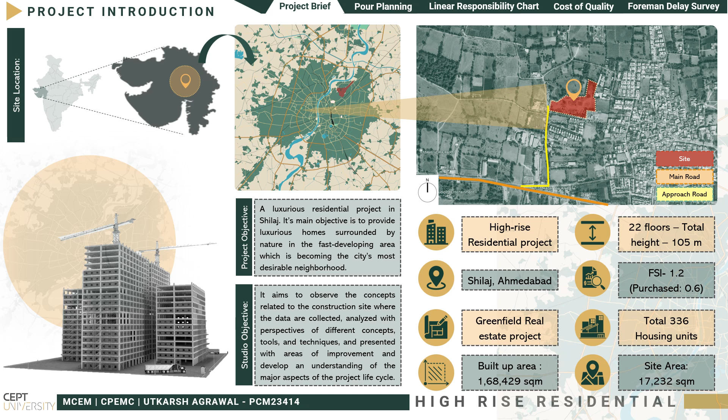This is a labor plus material contract, and the commencement of the same occurred on 17 May 2023. And the expected date of completion is 5th December 2025.

Pour planning is a detailed plan for concrete work that's completed after formwork drawings are approved and before concreting. For our study, out of the 5 towers, we are primarily focused on one tower for easy understanding. And as the towers are identical, there were two pours of same size, and due to privacy reasons, we weren't able to access the structural drawings on the site.

And that is why, from the architectural drawings, the different components of a floor, like slab, beam, and column, were considered and the concrete was calculated for the same. By applying the thumb rule calculation for each component as per the discussion with the industry professional, the steel quantity of these components is calculated and adding the same gives the total amount of steel consumed at the different levels of the tower.

The total quantity of the steel is further divided by the floor area to derive the average coefficient, as the steel of the whole tower is considered in the calculation of the steel for each floor. The value of the coefficient was again cross-checked as per the calculation by equating the same with the pour area for different levels and further was verified from the site keepers.

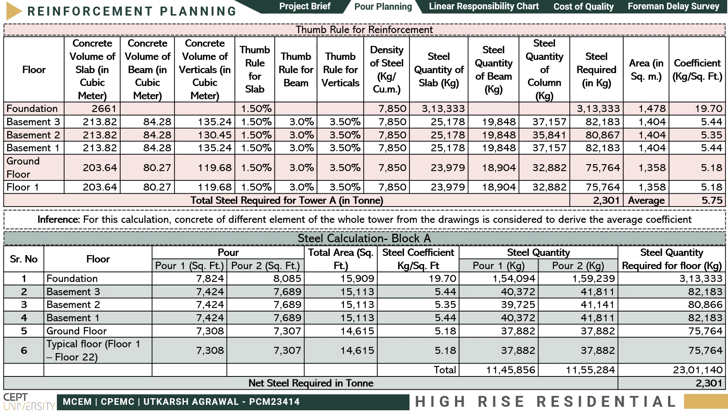For further analysis, we have calculated the peak requirement of reinforcement. It can be seen previously that the highest amount of steel is consumed in the foundation, justifying the reason for the peak in a single month. The next two upcoming peaks, the months of May and July, were also evaluated as there will be more than one pour that will be executed in a single month.

Direct cost is calculated for one pour itself, and the factors considered are reinforcement, binding wire, labor, and machinery cost, which comes out to be 30,27,434.

The labor productivity is calculated considering 25 labors, which includes both skilled and unskilled, that is 20 skilled and 5 unskilled labors, working for 6 days for 8 hours each day for a volume of 37,882 kg, producing work of 6,314 kg per day. The productivity comes out to be 31.57 kg per man hour.

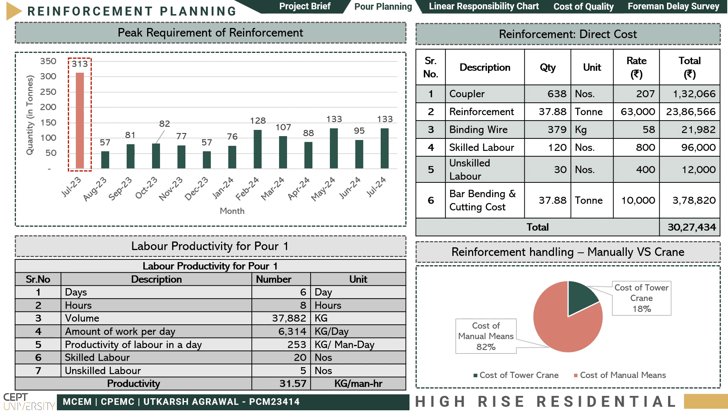Furthermore, we have also compared the cost of handling the reinforcement by crane or by manual means. It can be clearly seen that the cost of handling through crane is very less, but it is a faster method and reduces labor fatigue. Various factors like owning and operating cost were also considered for this analysis.

The linear responsibility chart shows the relationship and interdependency between the various teams on a project. The LRC is developed considering the quality management criteria only. This is the organization structure, and the members marked are the persons directly involved in the quality management process. And to understand their liability, their roles and responsibilities were understood first.

The client has an on-site team, and part of the team is directly involved in the same. Similarly, from the architect and structure consultant, senior and junior architects and engineers are involved as per the requirement of the client. The third party is involved as the inspection is being done before the concreting of each pour, and the third party lab is involved in the various necessary tests needed on site.

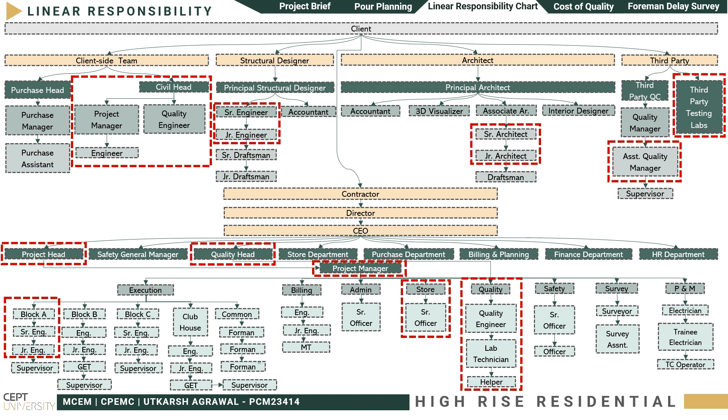The contractor has many verticals other than store and quality which are directly involved. As our prime focus is on one tower, the engineer of that is considered for the analysis. This is the LRC developed considering all three phases of the construction, that is pre-construction, during construction, and post-construction. Only 12 activities from the detailed analysis are shown here. Further, the horizontal and vertical analysis was done to identify the plus and delta for this LRC.

Starting with the plus analysis, the quality control senior engineer oversees 23 activities, out of which the role of actual responsibility is associated with 7 activities, which shows the structured environment on this project. The quality head oversees 12 activities, out of which the role of actual responsibility is associated with 6 activities, which shows that proactive quality measures are being taken on site. Activities typically involve 6 to 9 personnel, and there is a single person for duties and supervision, which avoids conflict of personnel and ensures efficient use of all the available resources.

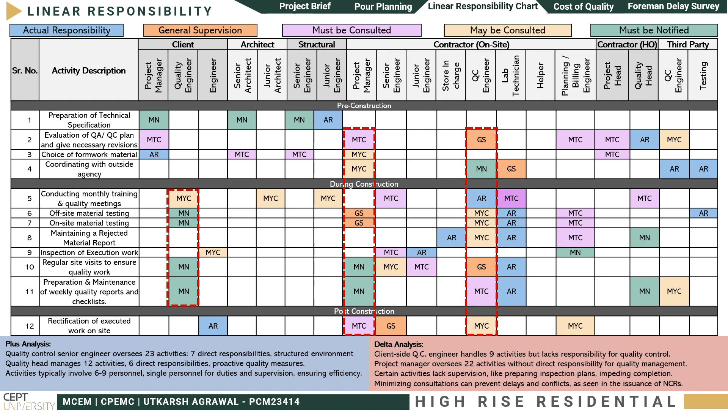Cost of quality is the cost associated with all the measures that are taken to sustain the required quality standards on site. It is divided into two parts: quality management cost and quality deviation cost. Quality management cost is further divided into prevention cost and appraisal cost. The bifurcation of the annual prevention cost can be seen in the pie chart on the upper right corner. It consists of the cost of quality assurance plan preparation, quality checklist preparation, quality control equipment, internal quality audits, operation cost of routine process control, purchasing control planning, and establishment of the QC lab.

The bifurcation of the annual appraisal cost can be seen in the pie chart on the lower right corner, which is of cost in process quality control, done mainly by the project staff, maintenance and calibration of measuring equipment, routine tests performed at critical stages of the construction process, and the annual cost of external auditing of the quality assurance system. The difference between both these costs is around 9 lakhs, and the cost of appraisal is more, as shown in the bar graph.

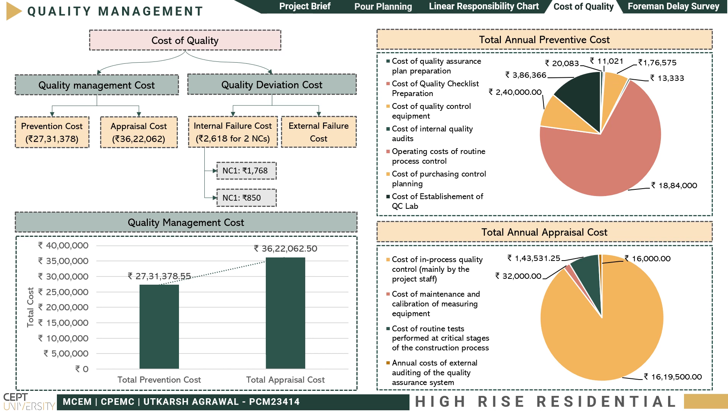The external failure cost is considered after the completion of the project, which is not in the scope of this study. For internal failure cost, two of the non-conformities present on this project were considered, and the total cost of both these NCs is 2,618.

Out of the two NCs, one of them is being discussed here, that is of adhered formwork in slab bottom and blocking. Reasons for this NC are poor workability, misinterpretation of the shuttering drawing, and lack of inspection. Preventive measures suggested by us are detailed and proper inspection, use of a different formwork system like MIVAN, proper formwork design and interpretation of the same. The cost of this NC is 1,768.

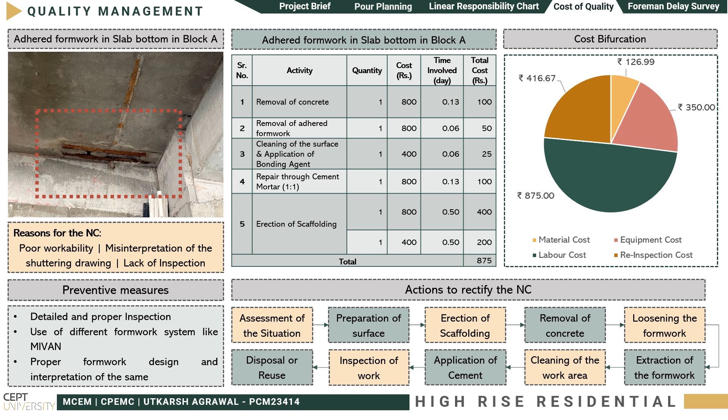In the upper right corner, the pie chart shows the cost bifurcation of the same, and as we can see, the maximum amount is of labor cost. For the labor cost, we have considered the cost of the labor and the time involved for each of them for the different activities. The various activities consist of removal of concrete, removal of adhered formwork, cleaning of the surface, application of bonding agent, repair through cement mortar with a ratio of 1:1 of cement and sand, and erection of scaffolding. Actions to rectify the NC consist of assessment of the situation, preparation of surface, rectification of the NC, inspection of work, and disposal or reuse of the material.

Foreman delay survey is a lean construction tool through which we can improve the working techniques and we can reduce the delays that are occurring on site. The activity observed for the foreman delay survey is staircase shuttering.

Observation date is 21 March 2024. Observation time period is 9 a.m. to 3:40 p.m. Total hours observed including the lunch time is 6 hours 40 minutes. The size of the staircase observed area is 16.98 square meters. Workers working in this activity are four people, consisting of two carpenters and two helpers. The location of the activity is Block A, fourth floor.

De-shuttering of landing 2 and beam 1 was done, and the application of the shuttering of the same is being done on flight 1 and landing 1. The two carpenters are doing the work of stripping or removal of formwork, measuring of formwork, fixing of forms. The two helpers are doing the work of preparation of the surface, gathering materials from storage to workplace, mobilization of shuttering materials, assisting the carpenter in removing the formwork.

As per the analysis for both the carpenters, the maximum delay is due to the other delay category, which is 31% for carpenter 1 and 39% for carpenter 2. Similarly, for the helpers it's 45% and 50% for helper 1 and helper 2 respectively. The other category consists of tobacco break, phone break, and idle time.

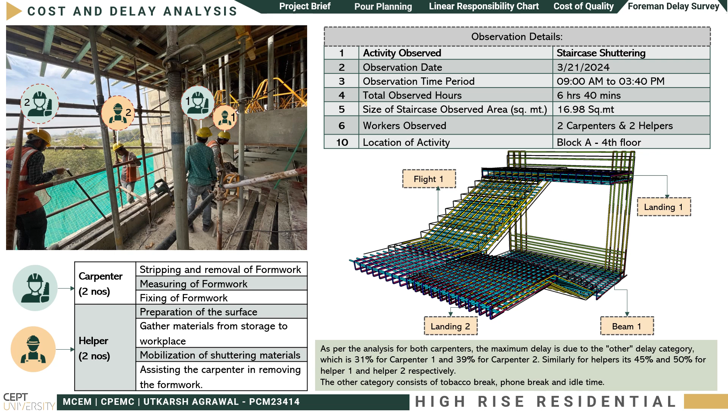Furthermore, delay analysis of carpenter versus helper. The maximum delay attributed to carpenters and helpers is caused by other delays, carpenter 35% and helper 47%, which can be mitigated by implementing supervision and monitoring. Additionally, optimizing workforce allocation for each task can enhance productivity and reduce delays.

For cost analysis of working and non-working time, from this cost analysis, it is found that a total of rupees 400 of loss happens in the observed activity. Of this, the majority of loss is incurred due to carpenter 1, around rupees 162, and the minimum loss is incurred due to helper 2, rupees 80. And helper 2 works the most, 345 out of the 600, giving the most working time among the four. And for carpenter 2, the highest of 410 out of the rupees 800.

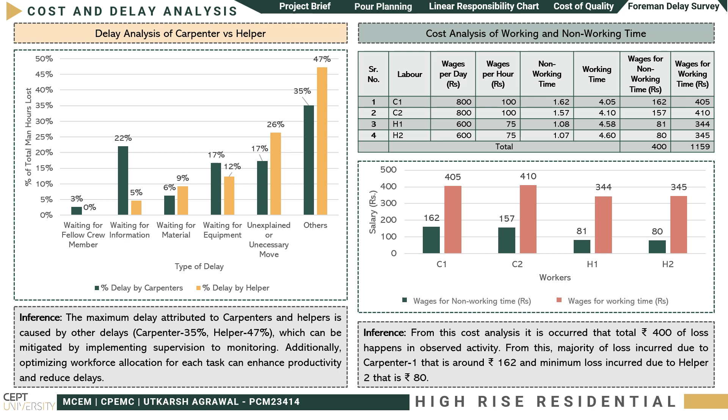At the end, concluding my study, the following are the key takeaways. First, pour planning. The primary component of pour planning, reinforcement, was looked at. The amount of reinforcement is determined considering the remainder of the project and the future. Pour planning deliverables made it easy to gain insight into the productivity, repeats, quantity, and cost of the project execution pour through the identification of the regions with the highest demand for labor and resources. Planning exercises improve the fundamental understanding of how to schedule a formwork system.

Linear responsibility chart. It establishes the priority standard. It's a clear definition of who is in charge of each task. A plus delta analysis is also carried out to comprehend the disadvantages and advantages of the existing organizational structure for quality control. Cost of quality is separated into two categories, prevention cost and appraisal cost. Prevention cost includes costs associated with basic quality standards. The appraisal cost includes the cost of extra measures taken on site. The contractor may use this cost breakdown to see how much they are spending on quality management.

Foreman delay survey analyzes the importance of proactively identifying and analyzing factors causing delays on site. It gives insights into delay root causes, enabling targeted improvement strategies, and emphasizes the importance of collaboration and communication among workers, foremen, and senior management in addressing productivity issues.